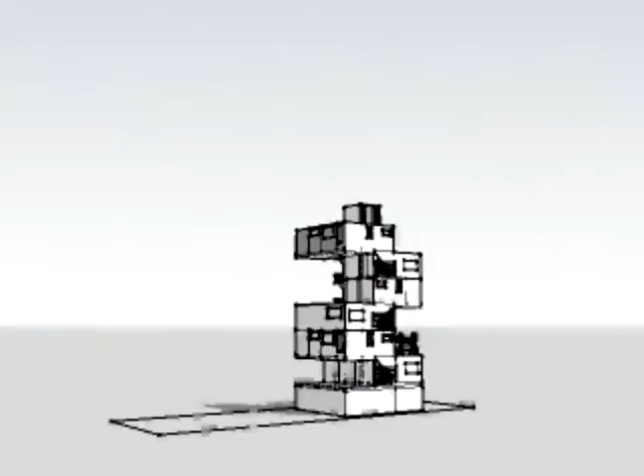Our solution to this ever-growing population and cost increase was through prefabricated modular design that took to the sky for answers. The driving idea behind the ideal house of the future was to make the most effective use of space through new ways of thinking about space itself.

To push the feel of private and separate spaces, a single modular home is formed as a coil up an elevator shaft that facilitates all the services of the building and creates a two-story experience within the home. The roof of your lower floor actually acts as the outdoor space to your upper floor area, creating a dynamic between positive and negative spaces.

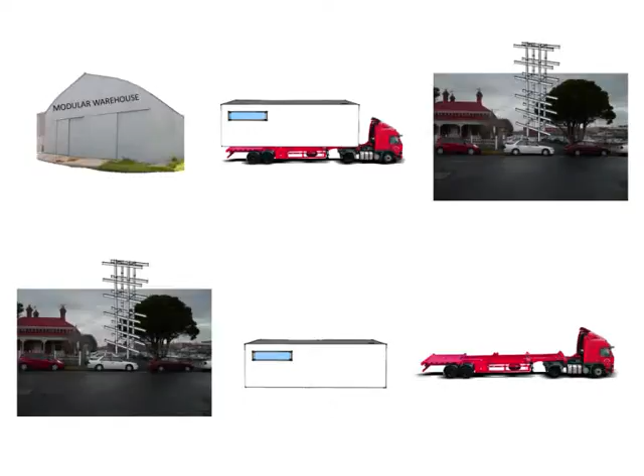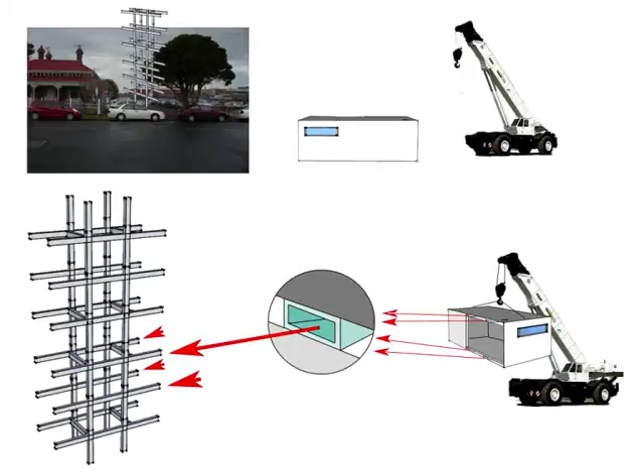Each level of a two-story modular home is prefabricated off-site at a manufacturing company. The two parts of the home are then transported by truck and delivered directly on site. It is then a matter of simply getting a crane to lift and slide the two units of the modular home into the steel frame of the shaft core. This process is repeated, building upwards to create multi-residential living quarters to house numerous families.

For sustainability, the walls are made out of sandwich wall construction, consisting of two separate load-bearing concrete skins with a lightweight core material. Closed-cell polyurethane is reported to be up to 97% efficient compared to some traditional systems, which can be as low as 35%.

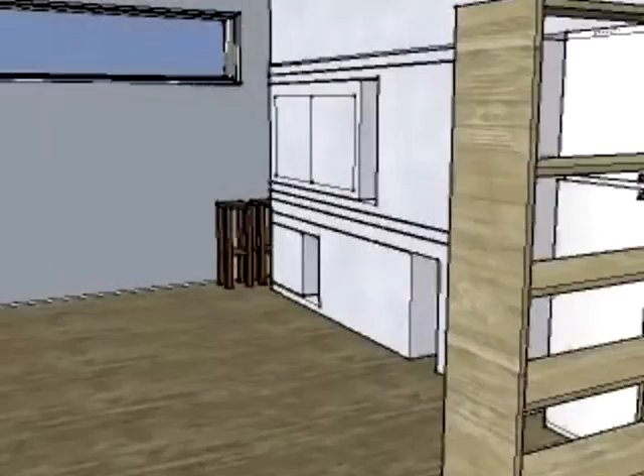In the kitchen, we have features which include a complete set of fold-away cooking appliances, fridge and storage space. This area, when cooking, is used as needed for each specific purpose, and can then afterwards be tucked away, which leaves more room to entertain guests and the like.

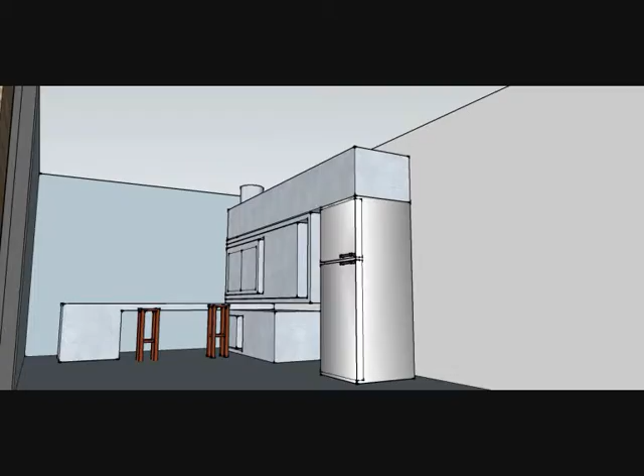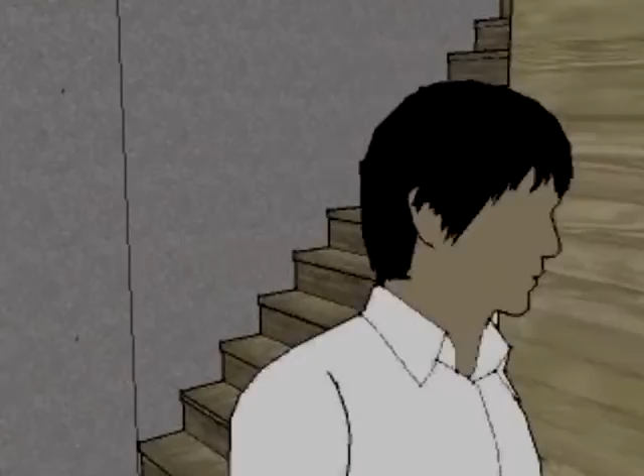As you can see, we've incorporated some shelving to save space for putting all your books and what have you in there.

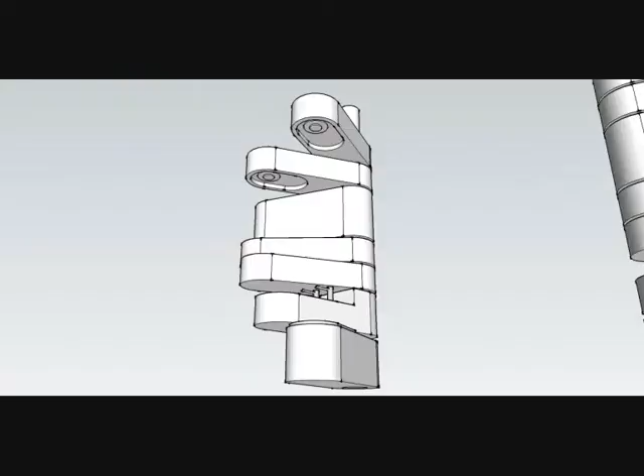Now, travelling up to the bathroom, we feature a similar system with all your bathroom needs that pivot on a single axis, taking up absolute minimal space, and just as in the kitchen, allowing you to make use of only what is required for the given space.

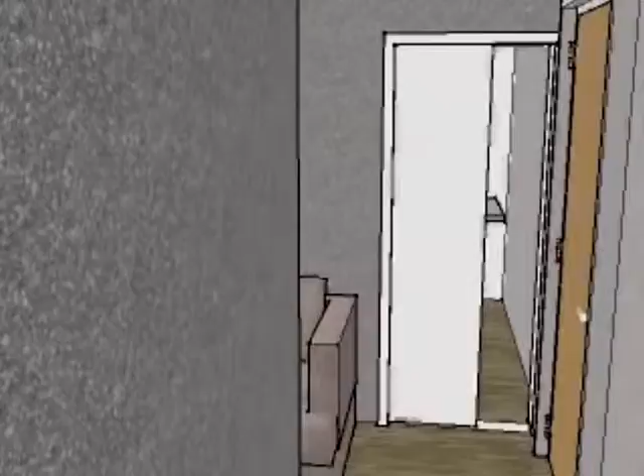Entering now is the upstairs kids' playroom, and just across from the wall is the master bedroom.

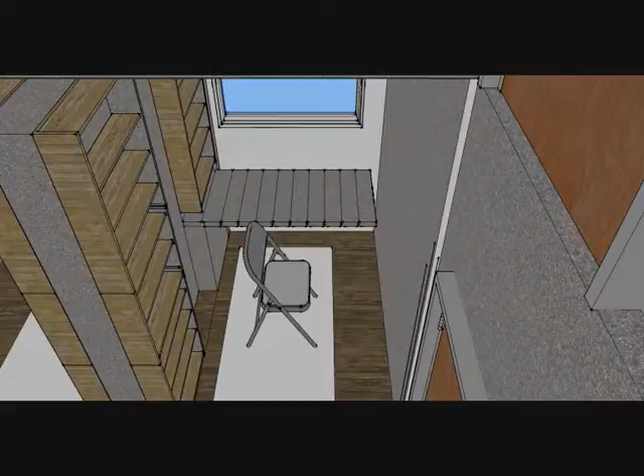Now, coming into the kids' bedrooms, they are completely transformable. Inside the floor, beneath a horizontal sliding panel, lays a mattress. When this is closed, the room which should be taken up by the bed can then be used for study space. When the wall is coiled, a roll-out table can then be expanded to whatever length is required. Finally, for your storage space, the wardrobe is situated in the roof, which swings down from the ceiling to a vertical position and is tucked back away when not in use.

Solar panels have been placed on the balconies, out of sight from the residents' view, but located for maximal light gains. This outdoor space facilitates a garden which allows you to grow your own food, as well as decorate with plants.

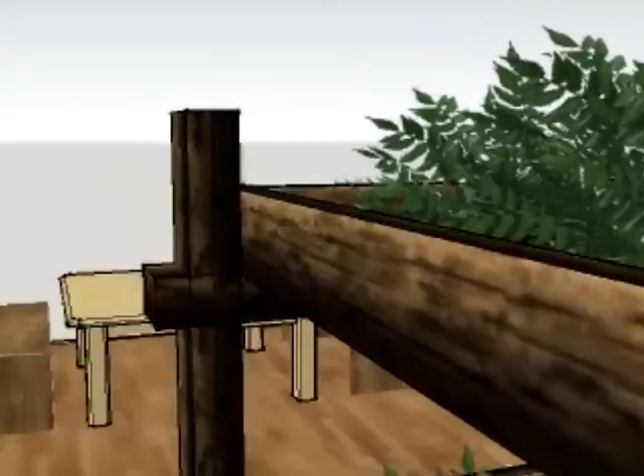In case of an emergency, there is a fire stair to the southern face of the shaft core.

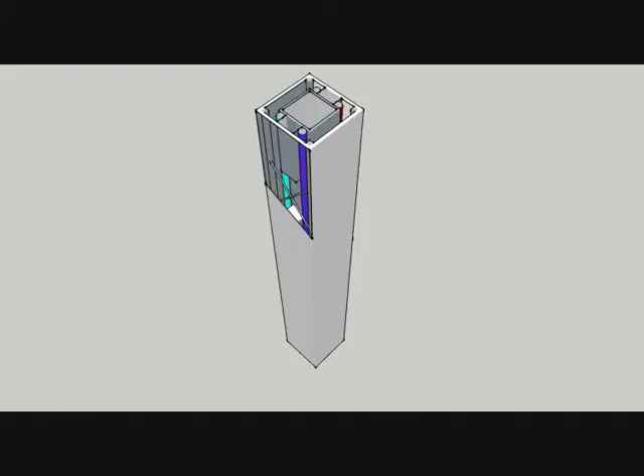Each floor is entered through an elevator whose primary access is through the ground floor lobby, which acts as an interface to the housing property. This ensures security and provides it with a communal space. As well as being the building's main structural member, the shaft core services all modular homes from top to bottom.

The maximization of space usage lowers costs. The integration of cooperative modular living spaces strengthens the sense of community and brings people together. Through prefabricated design and sustainable materials, there is less waste, it is better for the environment, and people are actually able to afford buying a home.